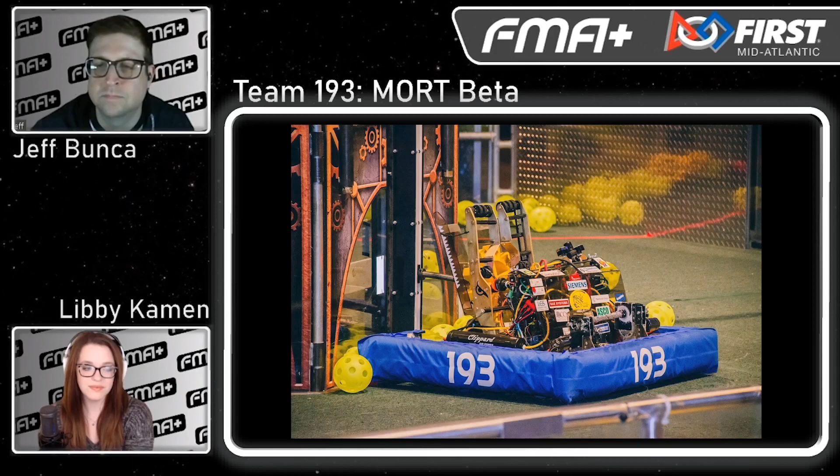MORT Beta was created in 2013 to give a more hands-on opportunity to freshman FRC students, because in our school, with its size, there are a lot of people going out for the robotics team. So underclassmen don't really get as much of an opportunity to work on the robot that upperclassmen really do.

That's really cool. So MORT Beta, obviously being the sister team, the JV team to MORT, Mount Olive Robotics Team 11, who I'm sure we'll hear from later in the FMA Plus season. But you guys applied first. Props to Beta. I'd love to hear a little bit about that relationship with MORT.

So we share a school with MORT 11, and we share our resources, our experience, and memories throughout the season. We definitely lack a lot of experience compared to them, but we make it up in our drive and our creativity, and we definitely have a sibling rivalry. It's a lot like gracious professionalism within First. We really want them to succeed, and we want to help them, and they want to help us, but we definitely compete as hard as possible, and we definitely want to beat them just like any other team, but I think it's a little bit more competitive between us.

Yeah, that's awesome. That was definitely one of the questions that I had on my list, whether you guys kind of kowtow to the upperclassmen, or are you the scrappy underclassmen getting in there to show them that maybe experience isn't everything. I like that attitude and approach. Yeah, our enthusiasm is definitely really high, so we want to try as hard as we can to do as well as them, if not better.

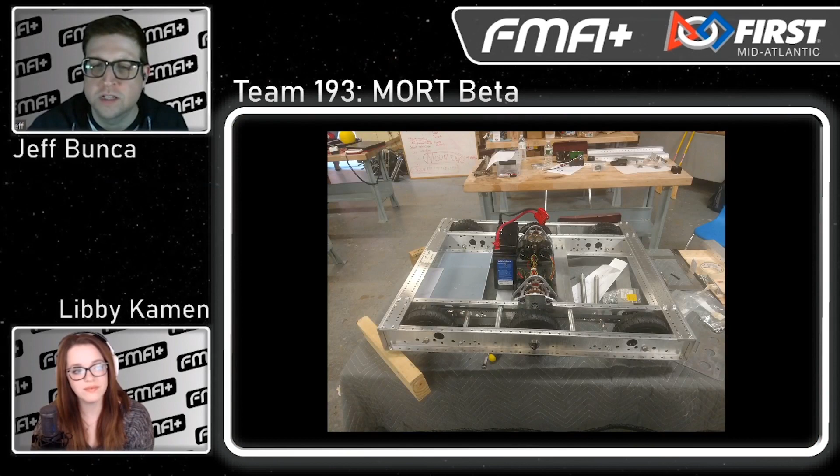Cool. So Rohan, it looks like you're the guy to talk to about the drivetrain and the drive base specifically. Maybe you'd like to talk a little bit about that now. Yep, for the drivetrain, it's the good old reliable AndyMark 14U4 chassis, and that's because we do not have to redesign a drivetrain, and this was the best option for us to choose. It has 6-inch pneumatic wheels for getting over the rendezvous point in this year's game. It was slightly modified to hold our gearboxes, and is powered by 4 Falcons, 2 on each side. It is a single-speed gearbox with a gear ratio of 75-13. And a planned change for this was to go from a double thickness pulley to a single pulley because they were shattering.

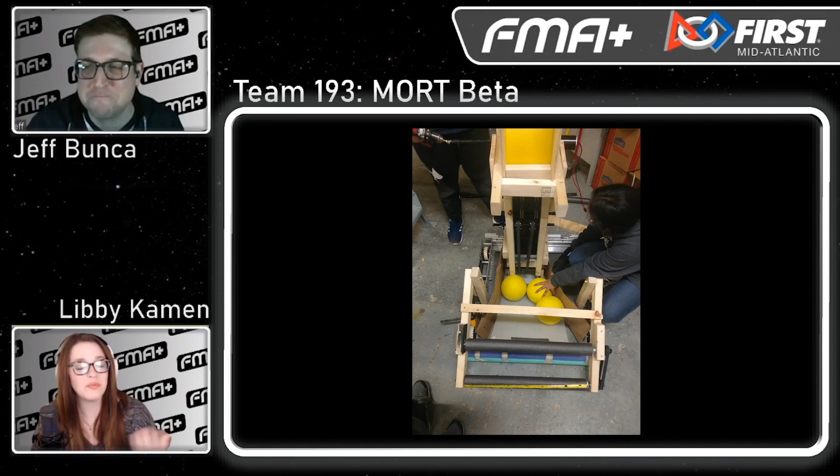So moving on through the robot subsystems, let's talk a little bit about your power cell pickup, that intake. So our intake was the first design that we ever made, and it worked well, so we just had to improve on it. It's an over-the-bumper design with a foam roller, and we have a PVC pipe and pipe insulation, which is covered in gaff tape, which prevents the foam from ripping. And it's powered by a Neo 550 motor, which is attached to a versaplanetary gearbox.

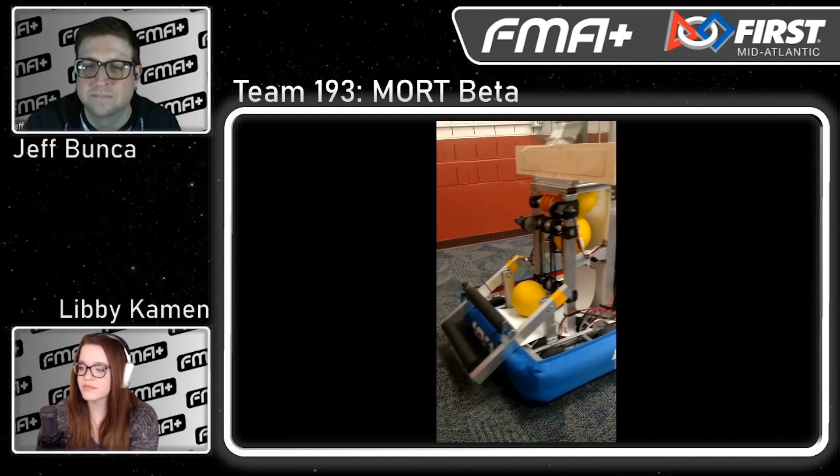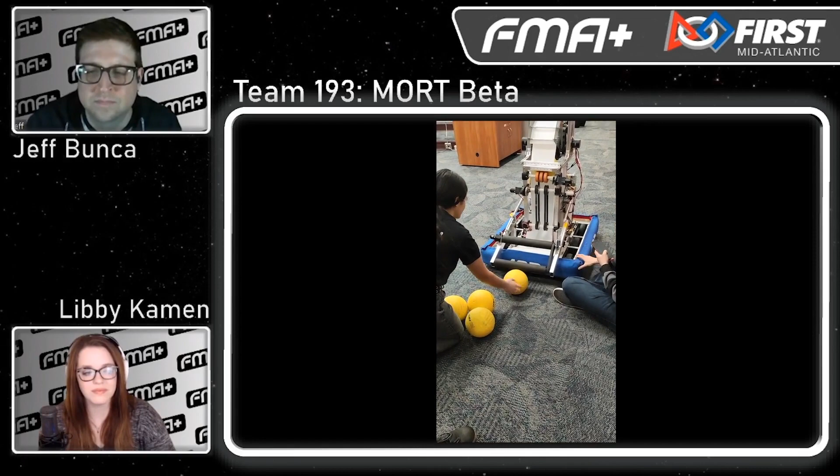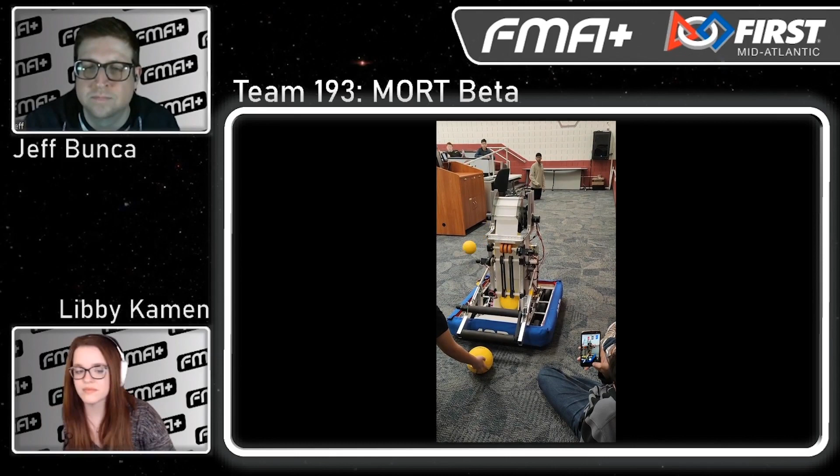It uses pneumatic cylinders to pull the intake within the frame perimeter. A tricky part of this was figuring out the best location for all our rigid pneumatics. We also had to make sure the intake had enough slack to move around, but not too much slack because it may become caught on other robots in a match. Another problem we had was jamming and ejection of power cells, so our intake ramp and compression were changed many times. After that, when power cells were brought in, they would also get caught on the sides of our ramp. To avoid this, we added some surgical tubing, tied to the tower and intake bars to bounce any ejected power cells inward.

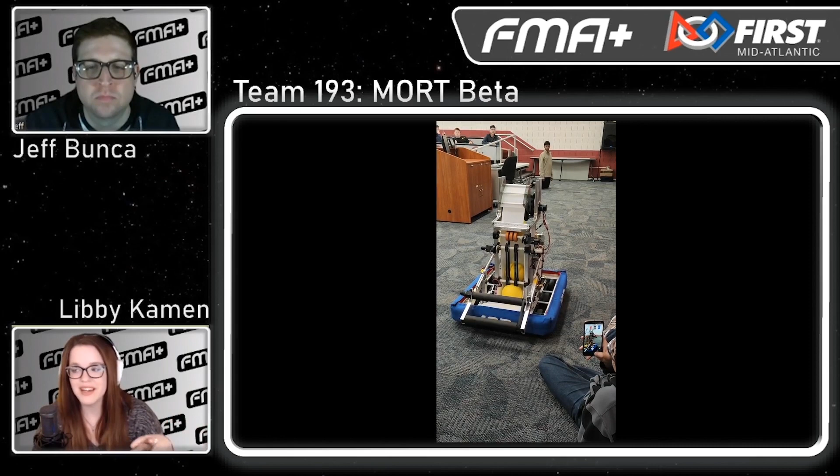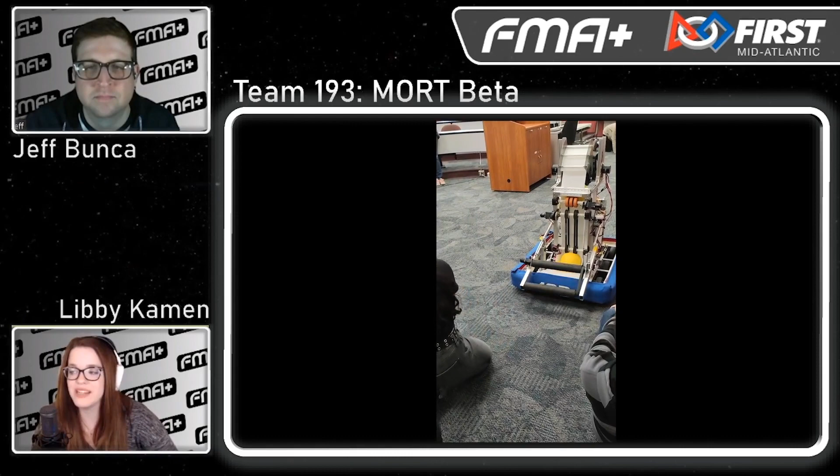That's actually something we're looking at on your video here. We can actually see in MORT Beta's prototype videos, their intake power cell goes up, looks great, and then it's a little squishy. I know this was one of the biggest problems with the power cells this year, was just how easily they like to jam in traditional FRC mechanisms. So it's good to hear you guys were iterating on making sure they got unstuck. Yeah, I think what really surprised me this year was just how small of a gap a power cell could work its way into - like 1 inch, 3/4 of an inch. It's crushing down into a little yellow pancake of disappointment.

Rohan, let's talk now about your tower and your feeder system.

The tower is the main structure of the robot, made out of VersaFrame. It brings power cells to the shooter and holds 3 of them. It has 2 belts on pulleys on one side, along with compliance wheels to push the power cells into our shooter. This system is powered by 2 Neo 550 motors connected to VersaPlanetary gearboxes.

If there were any areas we could have paid more attention to, it would have been the tower, because it had frequent power cell jams, which impacted how the power cells fed into the shooter. A planned improvement was to attach a second system of belts so the power cells would not jam as often.

That's great. I love that you guys are thinking ahead to when we eventually get back to our robots, and what iterations you would implement. That is a sign of a really good engineering process, so I think you have a lot to be proud of.

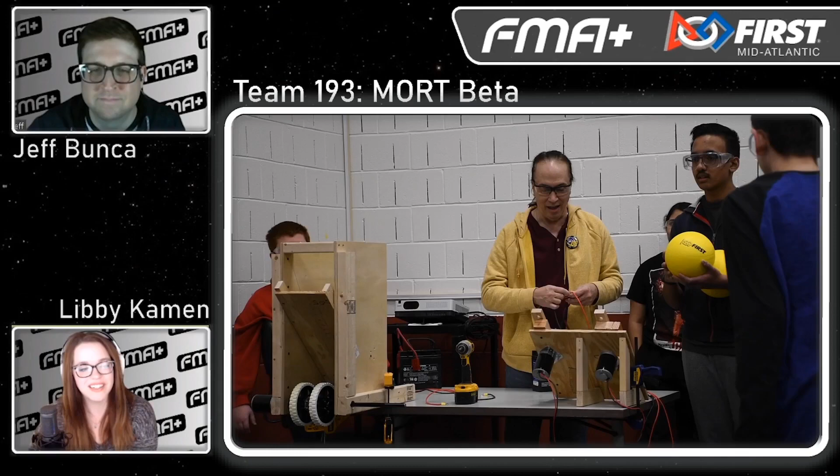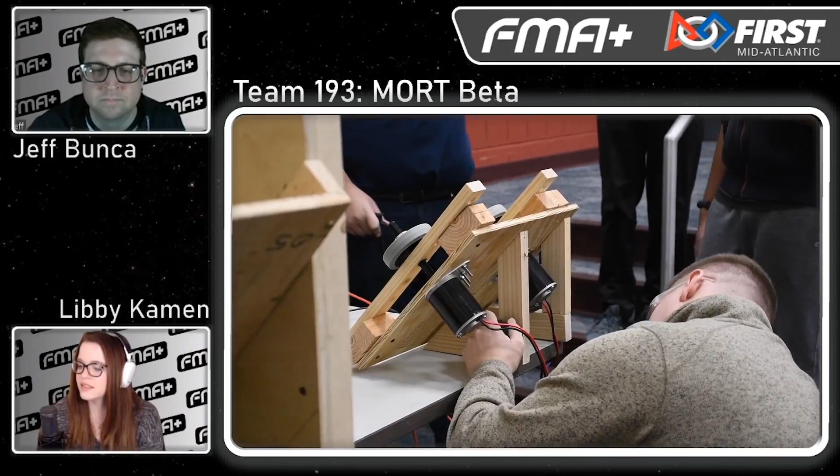For a shooter, we put a large focus on consistency and accuracy. We began by making different prototypes out of wood, a double flywheel and a single flywheel. We also accounted for human error while testing these two prototypes, such as the placement of the power cell into the shooter and the velocity of the power cell while entering.

In our wooden prototypes, we really looked at the angles, compression, wheel tread, the number of wheels, and the wheel mass and size. For the single flywheel, we experimented with a curved versus a straight hood, and settled on a curved hood for consistent compression.

The wheels are a really important part of our shooter because heavier wheels mean more stored energy, giving us good consistency and shot, but a long time to reach full speed since they're heavy. Both prototypes had their advantages and disadvantages, and were fairly even on performance scale.

I can see in your video here you've got the two sort of shooter types going head to head in your testing. That's a really nice way of quite literally comparing one to one what you're going to be doing. Nice work. What was next for that shooter?

Our final metalwork decision was a single flywheel as opposed to the dual flywheel. Some flaws of the double flywheel were that it added a lot of complexity to our robot, and it also gave significantly more power to the power cell, which was unnecessary because it would bounce out of the power port instead of going inside.

In our final design, we had a single flywheel with 4 high grip wheels, mounted to the tower on top of an Armorbot turret. We had 2 Neo motors at velocity control, geared to reach higher speeds. We also had an adjustable curved hood made of corrugated plastic, powered by a 25 kg servo and an overdrive ratio with a belt and pulleys.

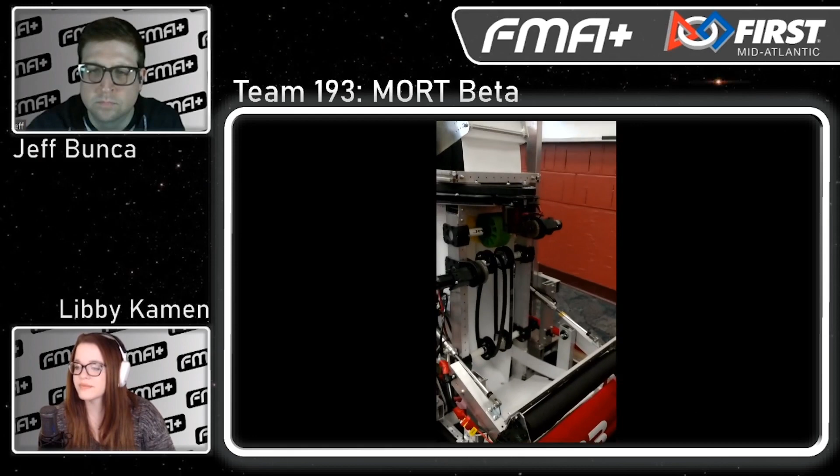But it was definitely worth it because it added much more versatility to the shooter. It was best seen at the practice field, and it was really amusing to see our robot shoot from various areas across the field.

Programming was able to bring their skills to improve our shooter with the limelight that outputs an X and Y coordinate of the target position. Programming also made mathematical relationships to automatically adjust the hood and turret positions.

Awesome, so it sounds like you guys are super prepared to score power cells into the power port. And obviously you know how you're getting them off the floor, or I guess acquiring the power cells.

But now let's talk endgame. Sophia, what kind of climber situation does MORT Beta have planned for the endgame this year?

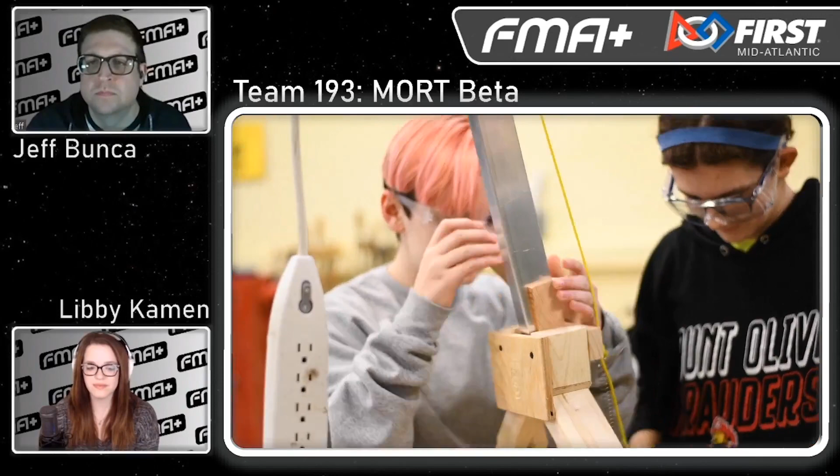We knew climber was really important to us, but it ended up starting later in the build season compared to the shooter, which took a lot of prototyping early on. We initially made a metal prototype using a big piston and a pneumatic system, but testing showed the pneumatics required to carry the entire weight of the robot would need 6 tanks, so it'd be too big and we didn't want to spend that much room on our robot for the pneumatic tank.

We had little room for error and would only really have one chance to climb with that system. Since we have an all-freshman team without the experience of a drive team, we didn't want to take that chance. So we decided to draw up a new idea using a spring, PVC, cord, strap, and motor system, all within a 2x1 channel.

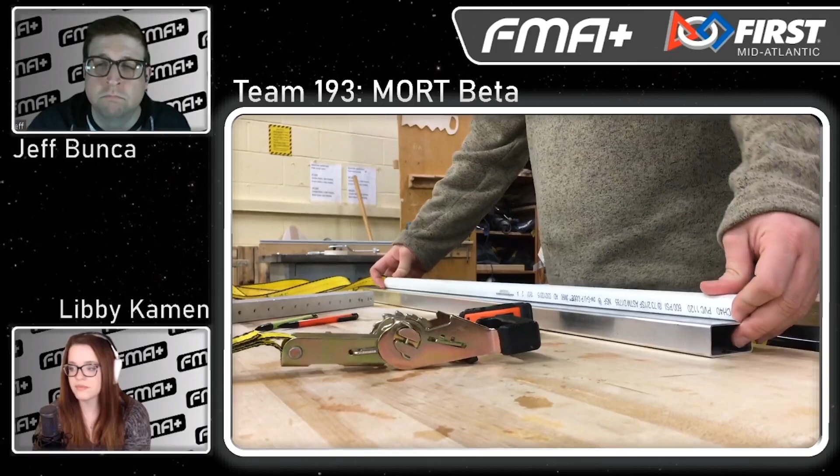Even that prototype changed a lot, and we used a lot of trial and error to find ways to prevent jams and maximize the climber's reach. We eventually settled on a design with a PVC running through a fabric sleeve attached to a 1x1, with a constant force spring running along the side inside the sleeve to propel the PVC upward toward the generator switch. This design really prevented jams and also stopped the climber from leaning while going upward, because we used a very sturdy fabric to hold it up.

We also added a ratcheting attachment to the gearbox so the robot would not fall when power was cut to it, and we planned to add limit switches at the bottom so we didn't damage the motor during the game. Since we didn't use a lot of CAD beforehand, most of it going to the shooter and tower placement, we had a lot of trouble finding where to mount the climber, especially since we wanted the robot stable and didn't want it to swing a lot, which would be dangerous for our robot and everyone else's.

So we mounted 2 climbers, one on each side, over the drivetrain wheels, so the weight was centrally balanced. There's not really a good way to plan for that in advance.

I think this is a really, really smart way of integrating a system that you didn't originally plan to have in a certain spot. That's really cool, guys.

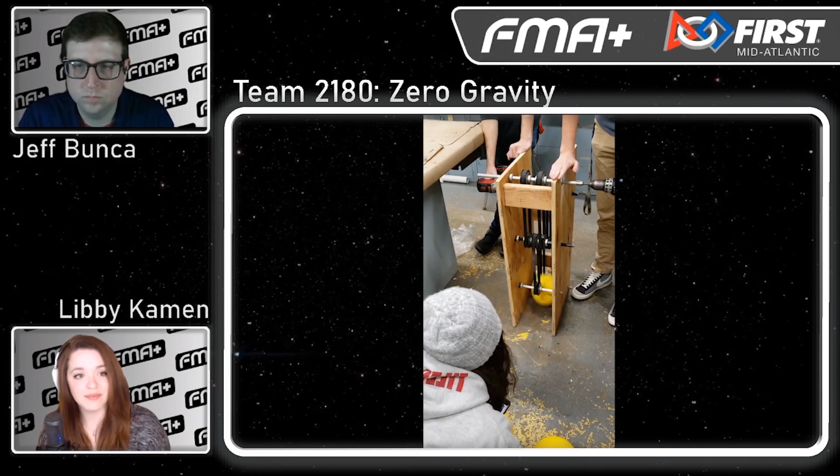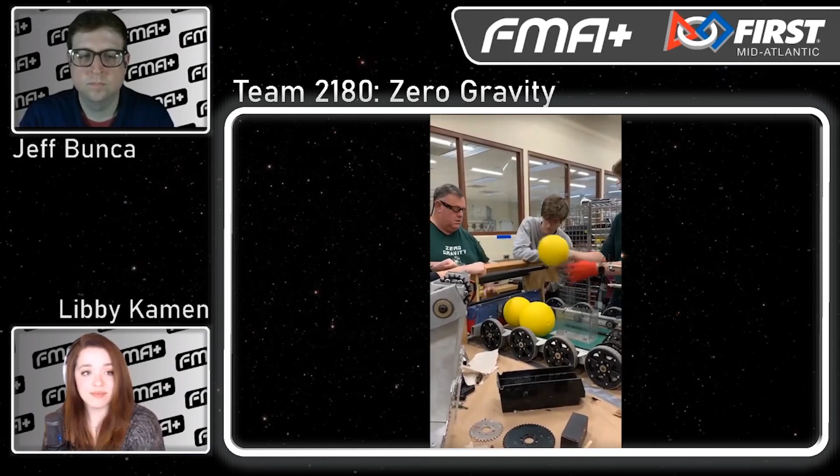You said you're going to overhaul your process, make sure your designs are effective. How'd you do that? In previous years, we really had one or two kids design most of our robot in our CAD and SolidWorks. This year we got a bunch of new freshmen, and I think 3 or 4 freshmen pretty much designed our whole robot, which was really impressive. They had great help from all of our mentors, but that was something that really helped us this year, because they came in with an untainted eye of stuff that our team personally didn't like, but they had never seen it before, so they didn't know what to think about it.

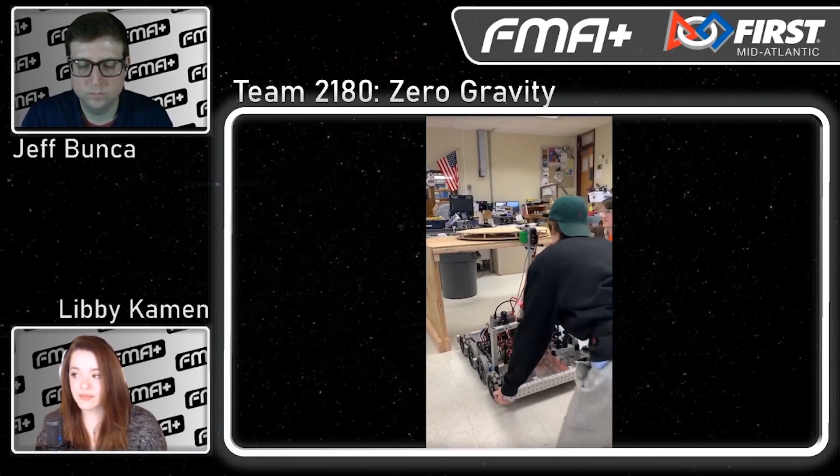We also put a lot of effort into really getting it right, through testing, through prototyping, and then fixing as many little issues as we could find before getting to final production, before hitting the final robot, which is really something that, at least from my distant perspective as a programming captain, we haven't really done in previous years.

Cool. So let me ask you guys this, I see a little note here, this might be a silly question, but it says here you started with a black box. What does that mean? So every year, as soon as we get home from kickoff, we all pile into our room, and we go over the entire game, what everything's worth, all the point values.

We read through the manual, and then we all sit together as a team and think about what we want the robot to do, but we don't imagine what it's going to actually look like. We just envision a floating black box, moving in some unknown way and accomplishing all of these game tasks.

So you guys talk about a priority list in terms of how you decide what the robot's going to do. What did your priority list look like this year? How'd that process go for you?

So once we finished our black box meeting, we had this huge priority list of things we wanted to accomplish, and it involved everything on the field. We knew that if we wanted to accomplish all of our very high aspirations, we needed to focus on designing subsystems and parts that would fit together, but that could be maintained, programmed, designed, and constructed separately.

It's always really important to look at things you can iterate forward on, especially as you're cleaning up your build season and trying to make it a really documented, robust engineering process. There's a lot that goes into that.

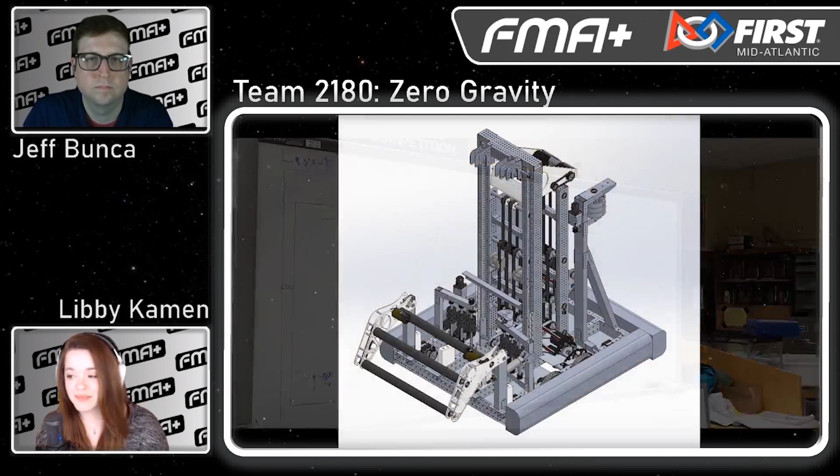So what was your next step? Where did your robot end up? I think our subsystem that probably went through the most iteration would have to be our intake and our funnel, as we called it. As you can see, it's made out of Lexan and some PVC wrapped in rubber on the final robot.

Our first prototype was wood with a couple of bearings punched into it. I think it's really interesting to see how far it came to find its final form. It was something we especially struggled with at our competition - we had a lot of trouble with that particular subsystem getting jammed, or it would just not fire in specific matches.

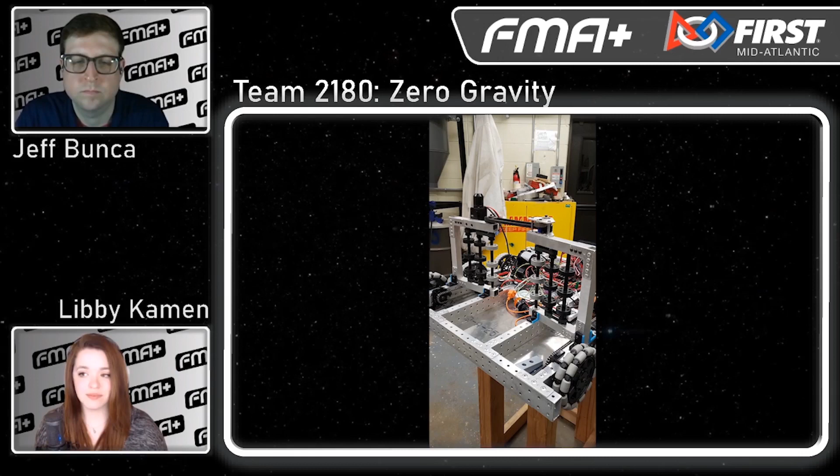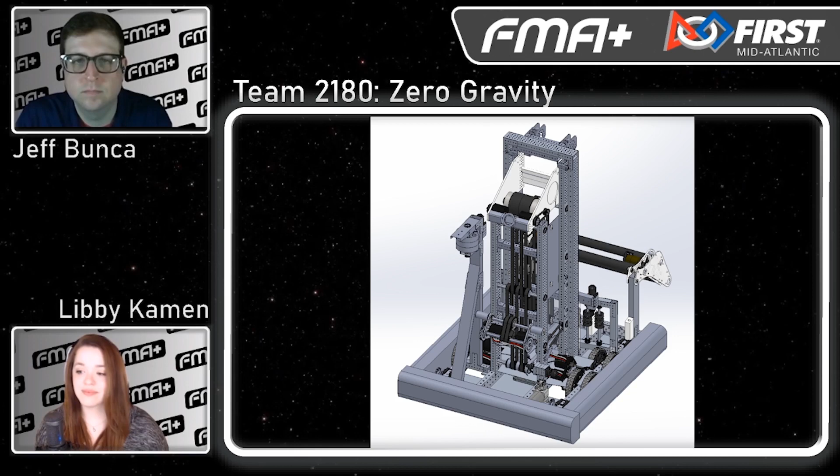That was something our pit team and Ravi worked really hard on to get going while we were at the competition. We later actually improved it, although with how things turned out, that improvement isn't going to see competition. But the newest version actually fixed a lot of the issues we were having, so we kept iterating through that.

Cool. Yeah, looking through the pictures of your iterations of the intake, everything looks really clean and well put together. So as you guys got ready for competition, you said you wanted to prioritize doing a little bit of everything in the game. I know, Robbie, you talked about being pretty proud of the robot's power cell shooter - why don't you tell me a little bit about that?

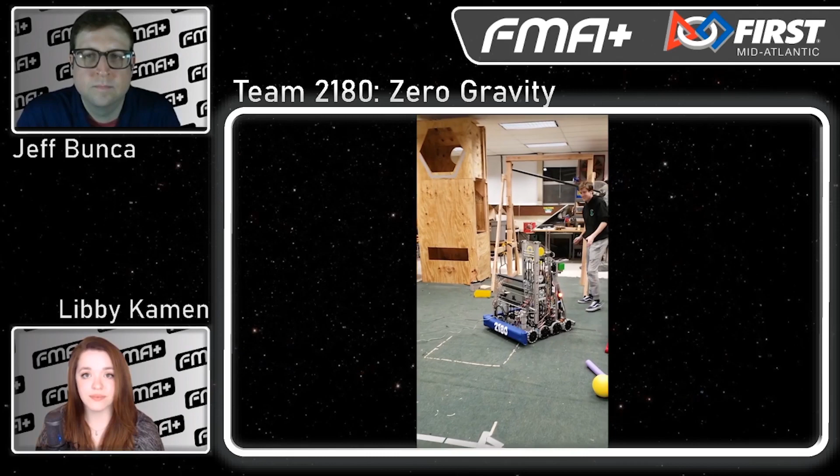I'm partial to it just because I spent most of the build season working on the code that would keep it consistent and accurate, and it actually wound up working pretty well once we got to competition code-wise. But mechanically it was beautiful - even the first prototype shot pretty well, and the actual final product was really incredible to work with.

Cool, alright, Ravi and Billy from 2180. Let me ask you guys - one thing that 2180 has right now is the fact that they got the opportunity to compete this year, which a lot of us have not yet been able to do. So what can you tell us about competing in Infinite Recharge in 2020 so far this year?

So for me, this year was a lot different because the last two years I was our operator, but our main driver graduated last year, so I was bumped up and promoted. That had a very different feel for me - that was a lot of fun.

But I feel like the entire attitude around the game this year is a lot different. Teams really have to work together in order to score the most points. It's something you kind of saw last year with assembling the rocket - you had to put on those hatch panels before you could put the cargo in.

It was something I thought was really interesting this year, the different team strategies of where they like to collect cargo, and how a lot of teams were just like, oh, you like to go there? We'll go across the field, it's fine, you can do that, we're good, we're flexible. That was really interesting for me to see, kind of the evolution of the game this year.

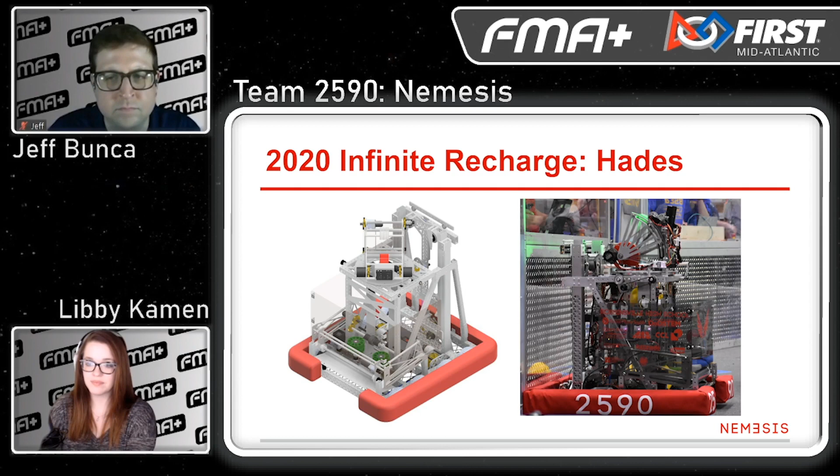Named Hades. This is a CAD rendering that we made in Autodesk Inventor, and on the right is a picture of us on the field at the Northern Connecticut district event that we were fortunate enough to attend. At the beginning of the season, we made a priority list of things we wanted our robot to do. First, we wanted to shoot from anywhere, even while under defense. Second, we wanted to achieve the trench shot, which is the shot from the far side of the control panel. Third, we wanted to have post-climb leveling to enable a third robot to climb. Fourth, we possibly wanted to make a buddy climb so that when we climb, we lift another robot with us.

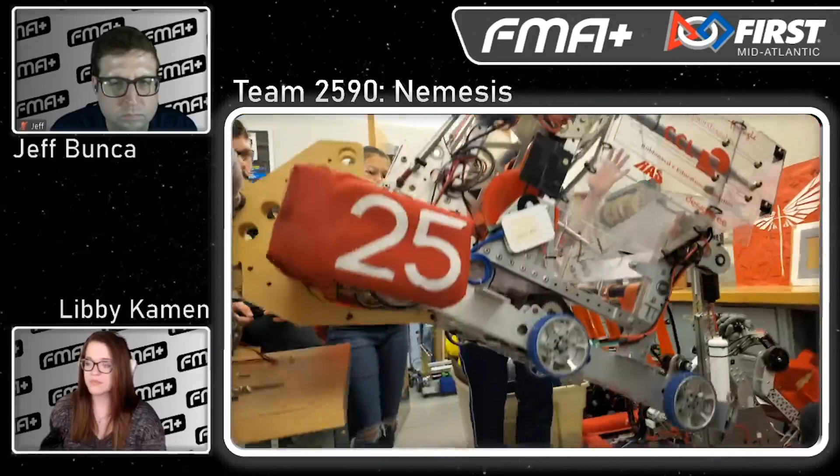For the drivetrain, we went with a West Coast Drive 27.5 by 32 inches squared with a speed of 8 feet per second, driven by 4 Falcons. We used 8 6-inch pneumatic wheels with an 1/8-inch drop center. The benefit of the pneumatic wheels is that it allows our tall robot to get through the rendezvous point quickly. The purpose of the 8 wheels is that it keeps our robot steady so that while we're shooting, it keeps a constant shooting angle, and for the trench shot that makes a big difference on whether we score or not.

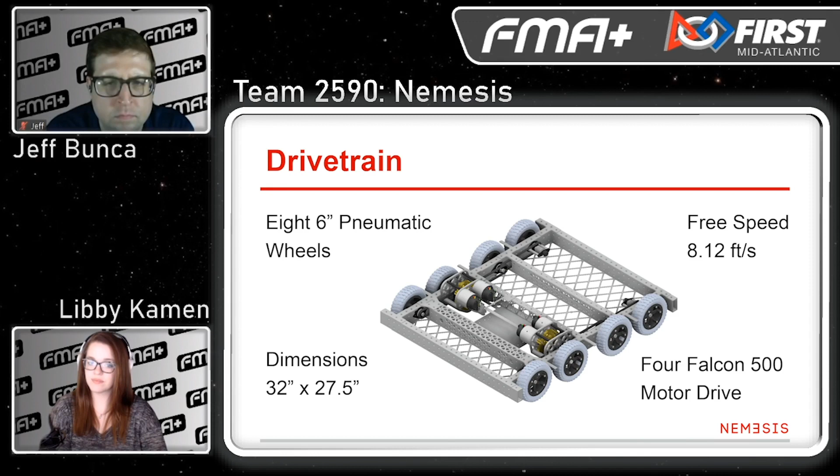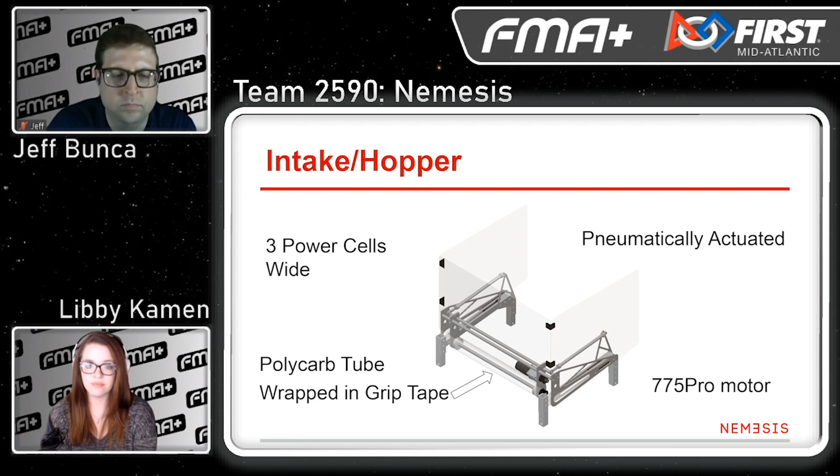So on the next slide is our intake and hopper mechanism, which we actually combined because they both needed to extend outside of the robot. We use a pneumatically actuated linear slide system to slide both out around 8 inches so that we can hold the maximum amount of 5 balls. Our intake itself is comprised of a polycarb tube that we wrapped in grip tape that is just as grippy as compliant wheels, but weighs a little bit less.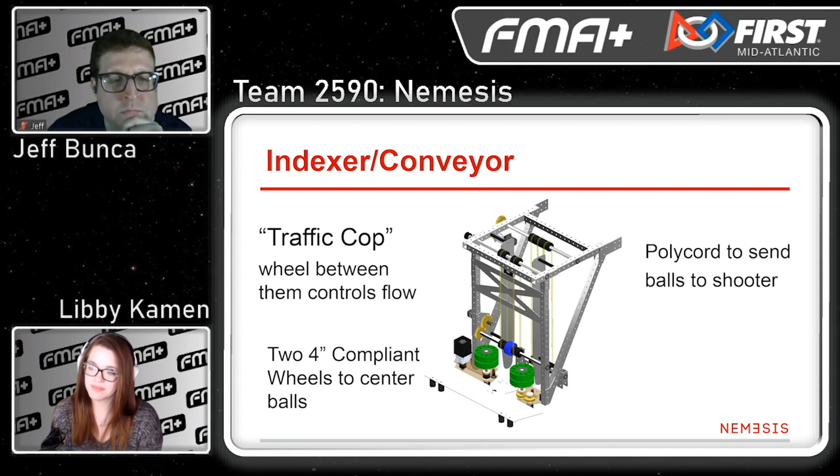For our final indexer, we went with 2 4-inch compliant wheels on either side of our hopper. Our conveyor is polycord bands on the front and back, and it's powered by a Neo 550 in the back. The blue wheel that you see is what we call our traffic cop. It's powered separately from our conveyor, so the bands on that shaft spin freely. This just allows us to control the flow of balls better and prevent further jamming.

So here we have our single flywheel shooter. We used a 6-inch Fairlane wheel. It has a variable position hood. This allows us to shoot from the initiation line all the way back to the far trench. And with constant limelight tracking, we were able to lock onto the power port using our turret to avoid defense.

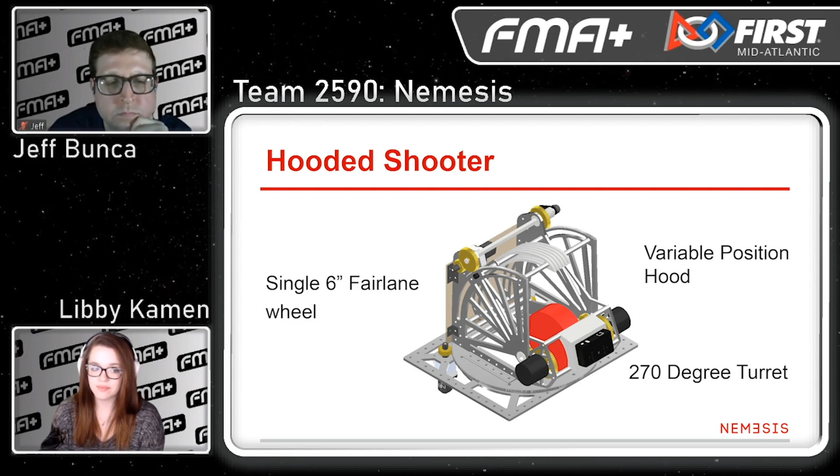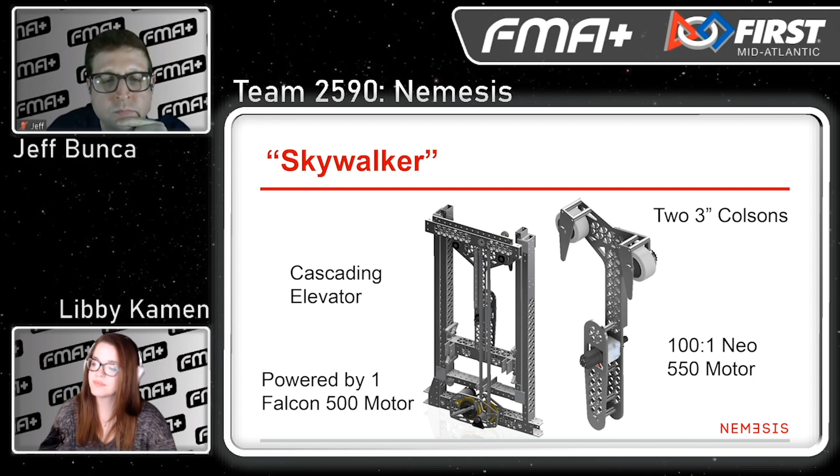So our Skywalker is the name of our climber leveler system. This mechanism uses 2 3-inch Colsons powered by a 100-to-1 Neo 550 to allow us to roll over the bar to get the extra 15 points. That mechanism is on a cascading elevator that's powered by 1 Falcon 500 motor that, because of a custom gearbox, can lift the entire weight of our robot.

Just to talk about software for a minute, we use a limelight to auto-align our turret, so wherever we are, our turret is facing the power port. That limelight also has distance sensing so that our shooter hood can adjust so that no matter what distance we are away, we can still make the shots in. We use proximity sensors in our conveyor so that we feed a ball every 7 inches, so that once we go to shoot, all 5 balls are right next to each other and we can shoot faster.

In Auton, we use path following software so we can have paths such as one where we shoot 3 balls from the initiation line, go into the trench, pick up 3 more, and then shoot those also.

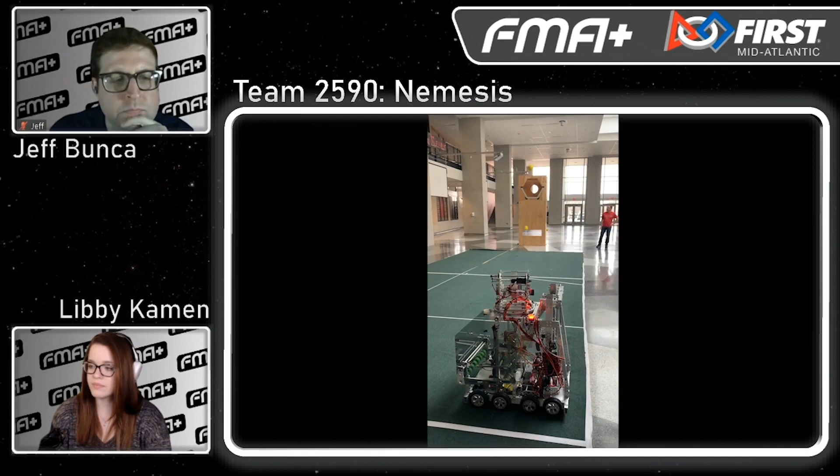This is a demonstration of our robot. We were just testing our intake to shoot our subsystems on the left. We were able to make multiple outer and inner port shots from the far trench. However, we noticed that when the balls were worn out or torn apart, they didn't shoot as far as we wanted them to. On the right, we have our turret.

This is the first time that we got a gear machined. We sent it out to one of our sponsors who laser cut it out, and it's powered by a Neo 550 on a Versa with a pinion gear.

Next we have our robot performing at our competition. It's hard to see, but we're in the left back by the Red Alliance trench, shooting a couple shots in teleop. On the right side, we were able to get a level triple climb with our partners in qualifications. We're climbing on the right.

During this competition, we ended as the 8th Alliance captain and we're semifinalists. To top it all off, we also won the Entrepreneurship Award.

After Connecticut, we saw a few things that we could change or redesign in our robot, most notably our indexer, because it was very prone to jamming since it overcompressed the balls. So our new design uses a turntable on the bottom to spin the balls in and a ramp that also removes all the dead zones. It still feeds our conveyor, just like the old one.

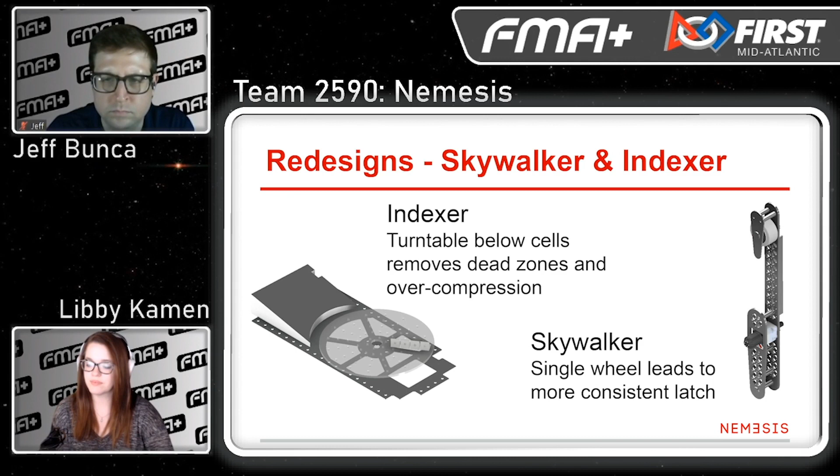Our Skywalker, during the competition, had a few problems because it was hard to line up both of the hooks and wheels on the bar. Sometimes when we would climb, only one wheel would get on, and we wouldn't be able to level. We realized that we didn't need both wheels, so we removed one. Now we can climb every single time and level once we're up there.

There were 2 main issues with our drivetrain. First, our turning radius was not as good as we planned because of how the pneumatic wheels squish, leading to scrub since the drop center was apparently not enough. The other issue is our high center of gravity, which caused us to be extremely tippy, making it harder to maneuver and intake power cells.

So in order to solve both of these issues without having to remachine the entire drivetrain, we made a simpler fix by changing just the wheel setup to 2 Omnis in the front and 4 pneumatic wheels in the back. This way we maintained our stable, powerful pushing force while also decreasing the turning radius.

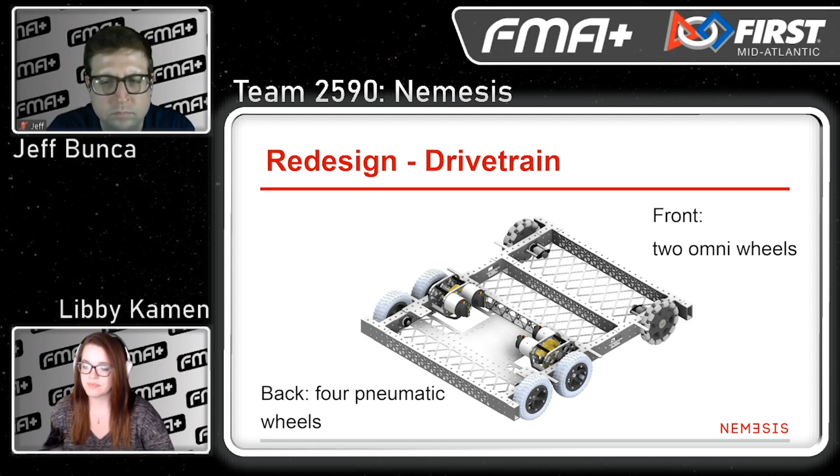So this concludes our technical overview of the robot. I want to thank you all for listening to us.

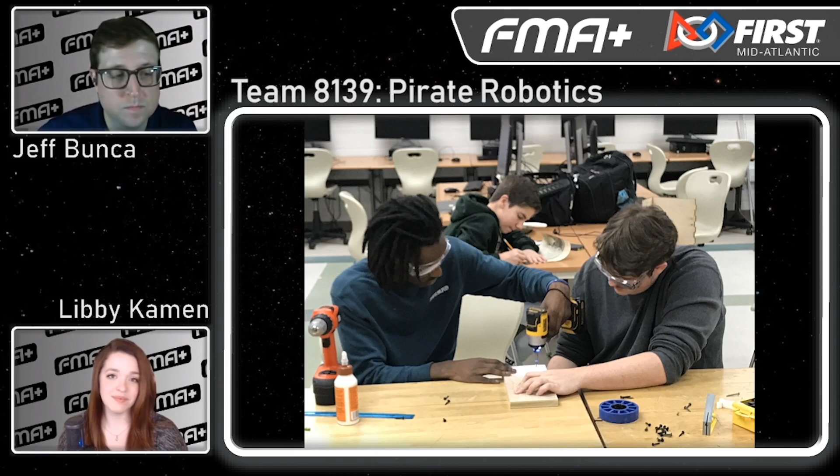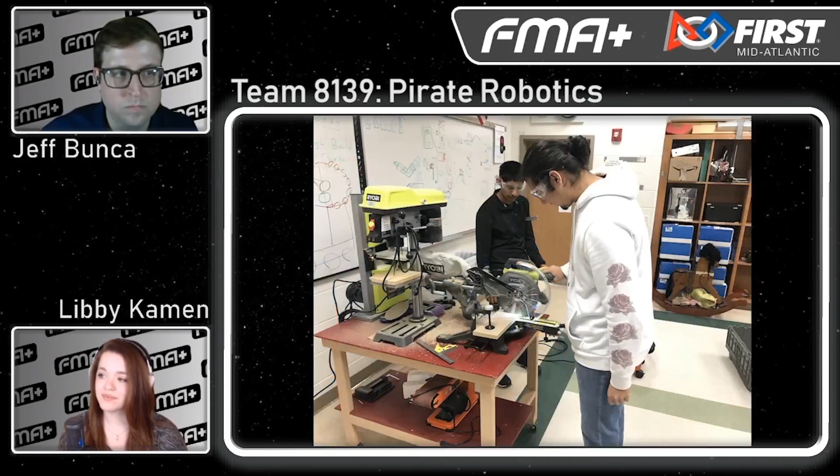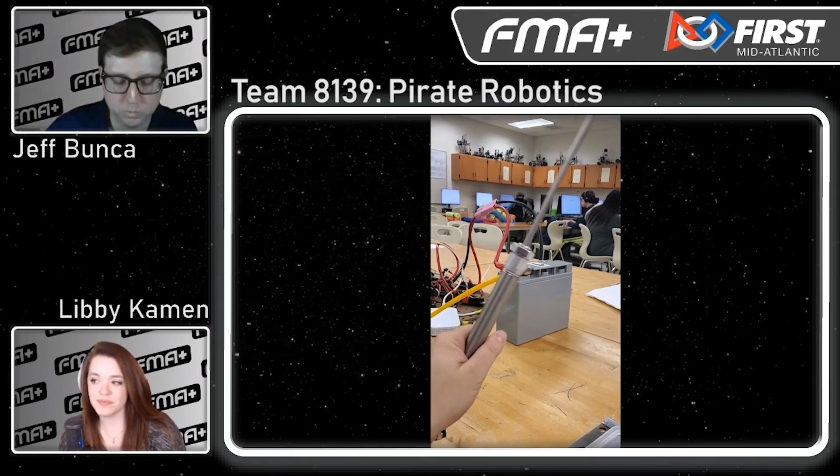Well, our team has competed for 3 years in the VEX Robotics competition. I personally, as a sophomore engineer, have only competed 1 year, and we did not compete this year. We've learned a lot of styles of the robotics challenges, and we know all the common concepts such as alliances and reveal videos, competitions, so that has really helped us in moving to FRC. Because we are familiar with running a robotics team and doing the basic tasks of designing and building a robot, it has really helped us, especially the way we've learned to work with each other, having groups of several engineers to help design and come up with ideas for the robot. It has been very good to help us in transitioning.

Cool, yeah, for sure. You guys are no stranger to robotics competitions in general. Adam, I know you've also done First Tech Challenge. You want to tell us a little bit about that experience as well?

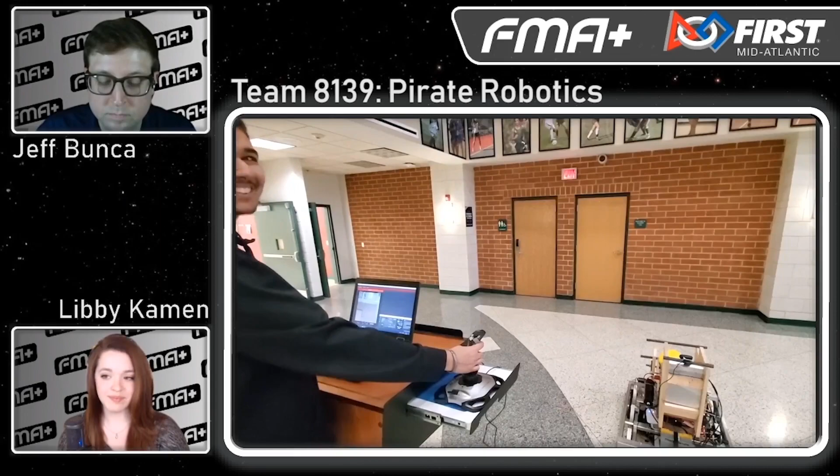Yeah, so I've been a part of an FTC team for the past 2 seasons with an outside Police Activities League organization. It's really helped me with this team going through the entire design process: breaking down the challenge, analyzing it, brainstorming what we think our robot can do, prototyping, coming up with different ideas and mechanisms before we actually start building, and then designing throughout the whole season, analyzing the different parts we need to buy and how that's going to fit into our robot. Specifically, I've learned a lot about CAD and how to use that to design parts, incorporate that with mechanisms, and really help with the overall design. But the most important thing is working together as a team to put all our ideas together to create one finished product. One of the things in the transition from FTC to FRC is learning all the differences in the design challenge, dealing with more complicated, more powerful parts, and figuring out how to use that and change the design accordingly.

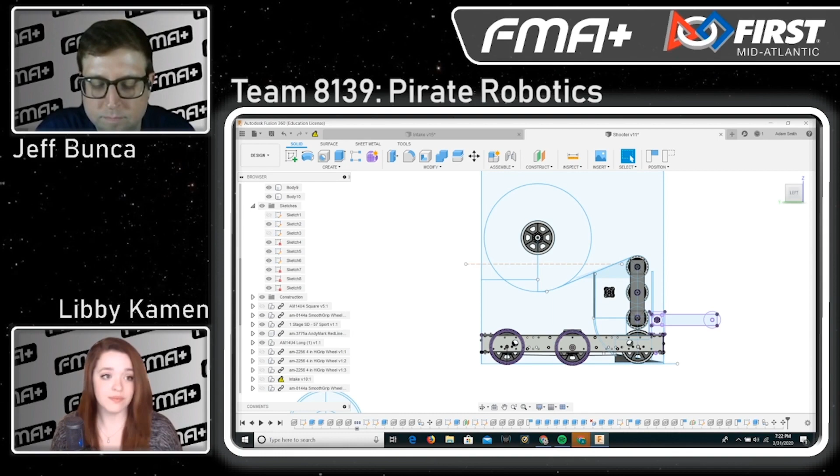It's awesome. It seems like you guys have a wealth of knowledge and experience for FRC rookies. That's really, really rare right now, I think.

Harmon, not to be outdone, it looks like you have a little bit to talk about here in regards to your experience with the engineering magnet program. Can you talk a little bit about that?

Yeah, so being a senior, I came into the school with the magnet program, which was the engineering part of it, and I was really passionate about engineering when I came into the school, so that's why I chose to go into that.

One of the things about going into the engineering magnet is I get to take a class. One of the classes was engineering design and development, in which I worked on a project for a year, and I have a good deal of experience working with real engineers and how to go about the design process, as we have to present our information to them in a specific order.

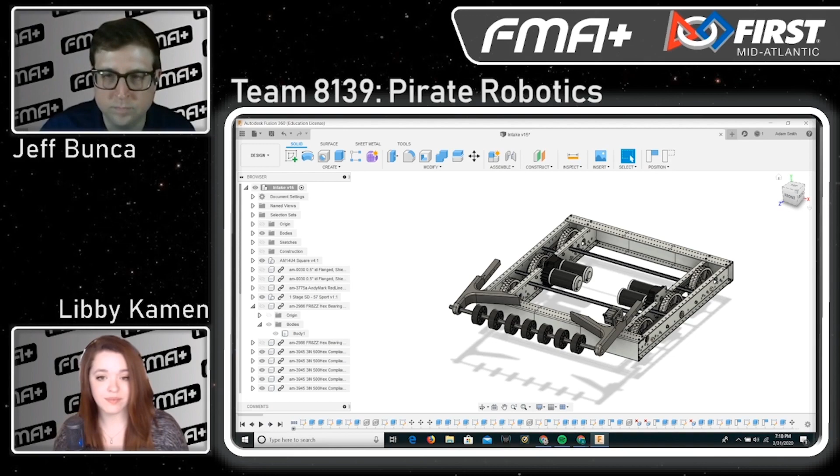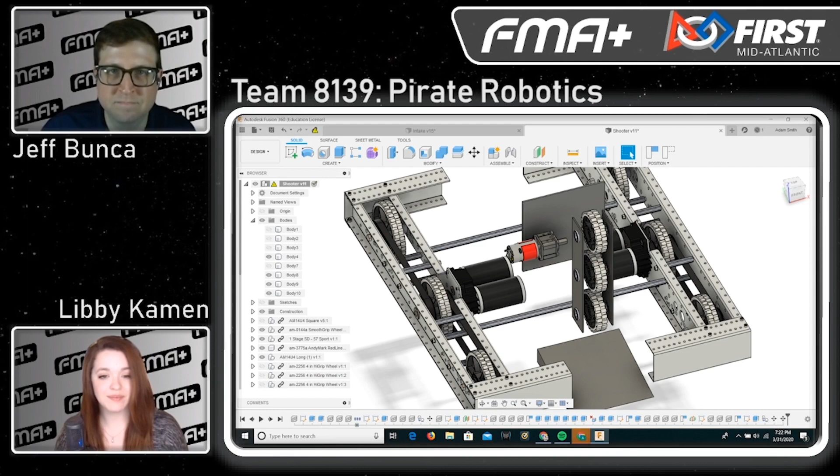Like we have to show our design process, our problem statement, and our purpose statement, and we have to model our time. So I have experience with modeling time and managing all the information given. And I did a good amount of coding during the magnet program as well, which gave me the experience I needed, and to back up all the extra coding I did, I had computer science, which really helped me understand what I was doing with my coding and how to go about it.

Very cool. That's awesome. Sounds like it definitely sounds, I gotta reiterate, Libby, it seems like they're so prepared for this. I'm really, really excited to see these guys compete for sure.

Absolutely. So Sam, like you've said, you've been with the robotics program for quite some time, and you've done VRC as well. So tell me a little bit about, from your perspective, the challenges of moving specifically to the FIRST Robotics Competition for your team.

Of course. So one of our main problems was we have such a young robotics program, and with that, we don't have a lot of money invested in us. So when we found out the prices of the parts and the entry fee into FRC alone, we were a little worried because we didn't have any money in our bank account.

But we were fortunate enough to search for grants, and our school was able to get a grant from NASA for us that was able to pay for some of those supplies and our entry fee into the competition. So that was really amazing.

We were fortunate enough at our school that most of us are involved in an engineering magnet program, or just all of us are very passionate about our robotics program. So we're there from 2:30 to 6 o'clock every day working on it. Working on the robot was great.

Our main challenge moving from VRC was that we now had the opportunity to work with any parts such as wood, metal, motors, that you had to put a motor controller box on, which a lot of us aren't used to, but it was amazing to really gain that real life experience outside of VRC.

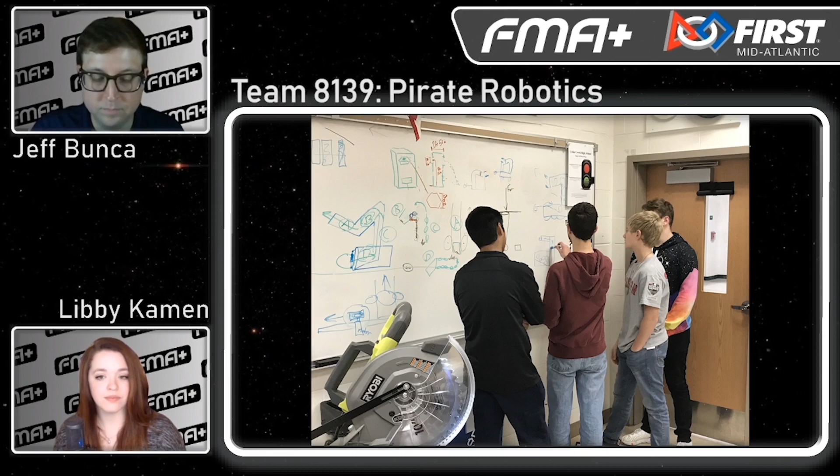We broke the robot down into parts, and we said, okay, well, out of the point system, what are the ways we can get the most points? And we came up with, we wanted a shooter robot.

So if we want a shooting robot, how do we want to do that? We would hash it out with almost a debate session in our group. Our engineering process of identifying the problem, coming up with designs, we had a lot of prototyping, a lot of testing to see, does this actually work? Is this our best option? Where should we go from here? And from there, test and retest is really our slogan. Try it again, does this work better? And just re-identifying the problem. So we were really working to make sure that no matter what, the engineering design process wasn't forgotten.

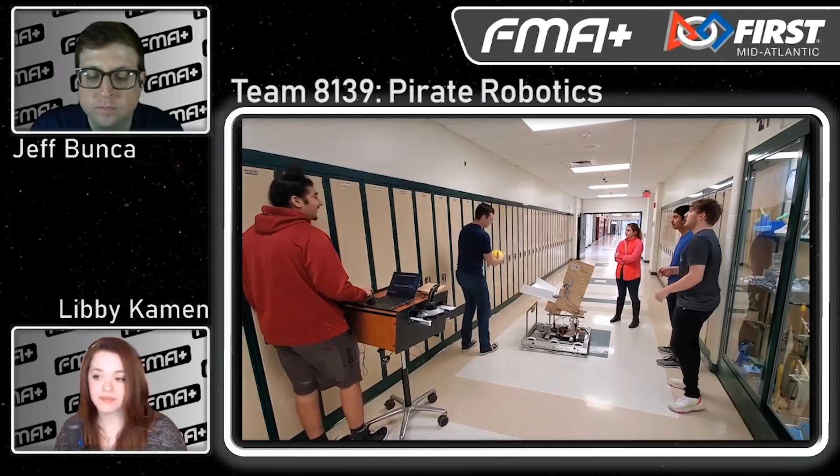That's fantastic, you guys come from an engineering background because you've got the process absolutely nailed. So Sam, and maybe Thomas and Adam, you guys can chime in here too. I want to back up a little bit. You guys talked about this debate decision-making process, and in previous conversations you've talked about how you try to apply a certain level of democracy to your design and decision-making process. Can you talk a little more in detail about that?

As a project manager on the team, it was really important to me that everyone had a say in the robot, that everyone felt our robot was going to be the best thing it could be. So I remember in one of our first meetings, I took a packet of Post-it notes and had everyone write their name and how they voted on how to decide for the robot. We drew columns on the board and everybody put their Post-it note in. When we ended up having ties, each time we'd choose one person from each side to debate out why we should go with the shooter over a hanging robot or a spinner robot.

So that was really important to us. Debating is one of the best ways to find flaws within the systems of the robot before you start designing, so we found that helped a lot. We learned how to compromise a lot within the design. Some team members hash it out a lot between designs, and they come together and figure it out from there.

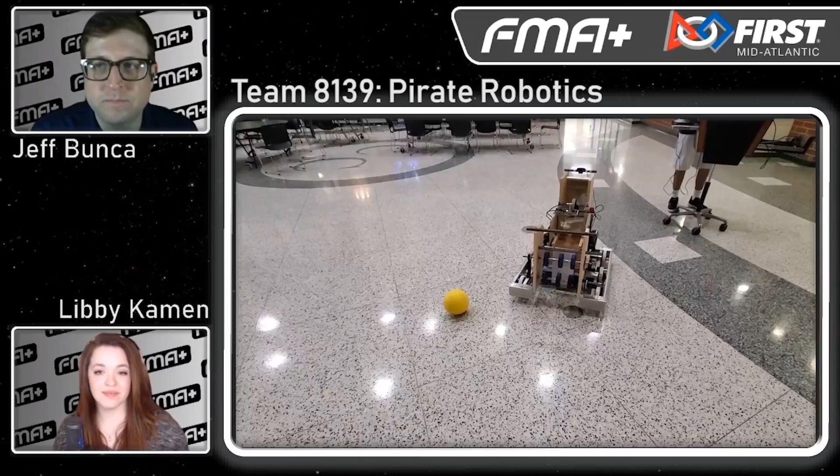So we had two main component sides of our robot. One was the shooter that Tom talked about, but the other was an elevator system that we made to intake the balls and feed them and elevate them to the shooter so they could be rapidly fed into the shooter.

So currently what we have with our robot is a kit, just a kitbot chassis that has the normal CIM motors. We have an intake which can intake and store 2 to 3 balls. We have a pneumatic piston that stops the balls from going into our flywheel shooter and lets us do one at a time so the flywheel can regenerate its speed and inertia after each shot. And then we have the flywheel which can shoot 10 to 15 feet accurately, and 20 feet if we just blast it.

That's awesome, it's a pretty good range right there. I like that you have that documented. It's like the options are aiming for goal or just send it. I love that, just blast it.

8139 Pirate Robotics, we've been so overjoyed to have you on our first episode of FMA Plus, one of our rookies here in FIRST Mid-Atlantic. Anything else you want to share with the robotics world before we say goodbye? Thank you so much for having us, we're really excited to be with you guys and talk about our team. We want to extend our thanks to Argosy for giving us a tool grant to help start our program, as well as NASA for giving us support to start up and enter FRC.

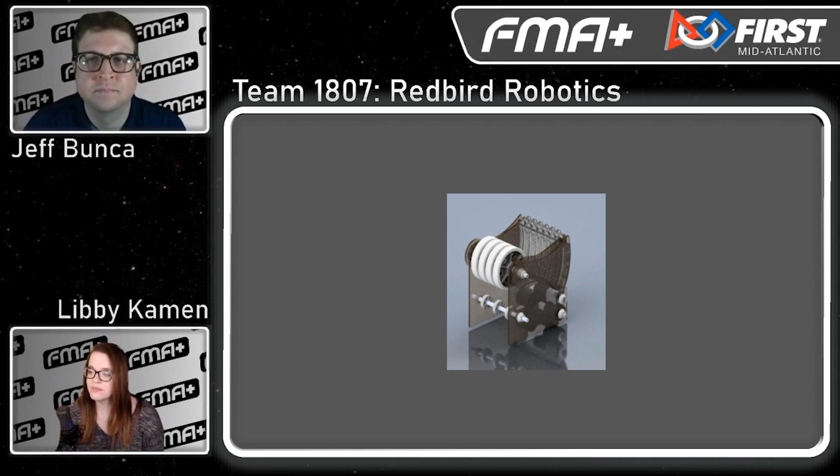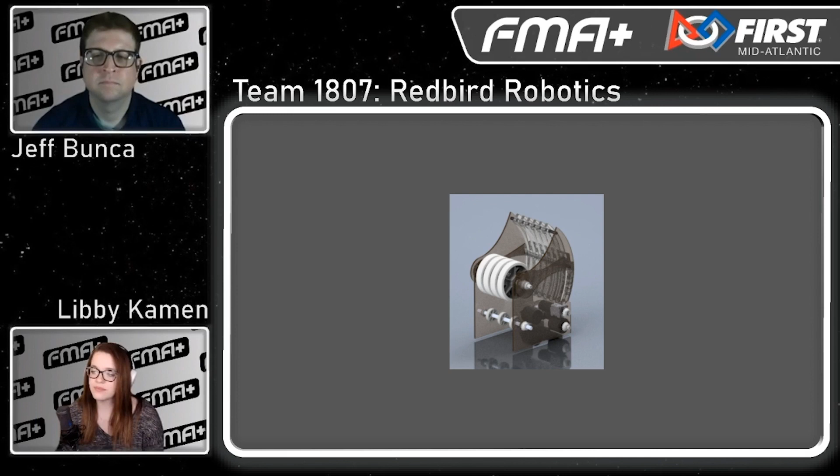Yeah, so the prototype process, I know Dan can talk more on this because he did the indexer, but for the shooter, we went through several rounds of development. Not only the one idea we were going on, we also had another shooter group. So we had my shooter group, and I was partners with Shane, another designer on the team. And then we had another shooter group, which was a 2 flywheel group. So we had 1 flywheel and they had 2. The idea was they just put the ball in between, and then we had ours that had fingers that changed the angle of the ball going up.

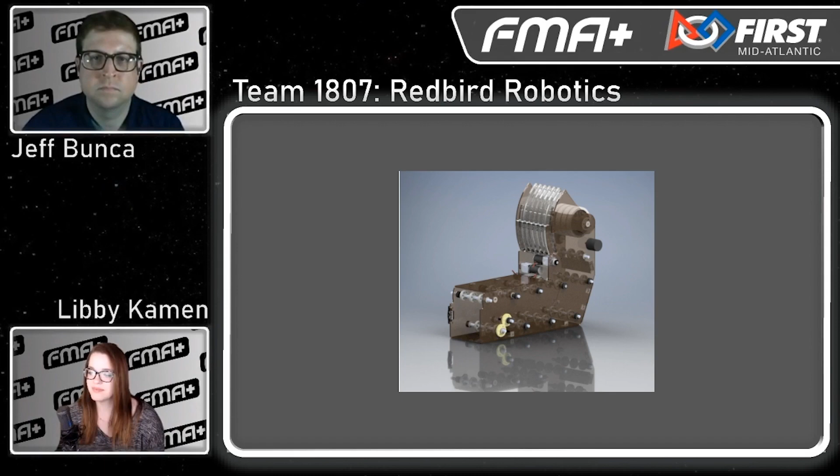But yeah, like you said, we also have a CNC router, but the CNC is great, while the laser cutter, that thing, when we had an idea, Shane CADed it up for me, boom, right on the laser cutter, 2 minutes later, pull it out, we're done, we're testing, on to the next one. I don't know about Dan, but I know the laser cutter is definitely instrumental in that, and going through all the processes without being held back, having the laser cutter allowed us to go that extra mile. Oh, that's awesome. Having that kind of rapid prototyping capability and being able to get to a final product that quickly is huge for sure.

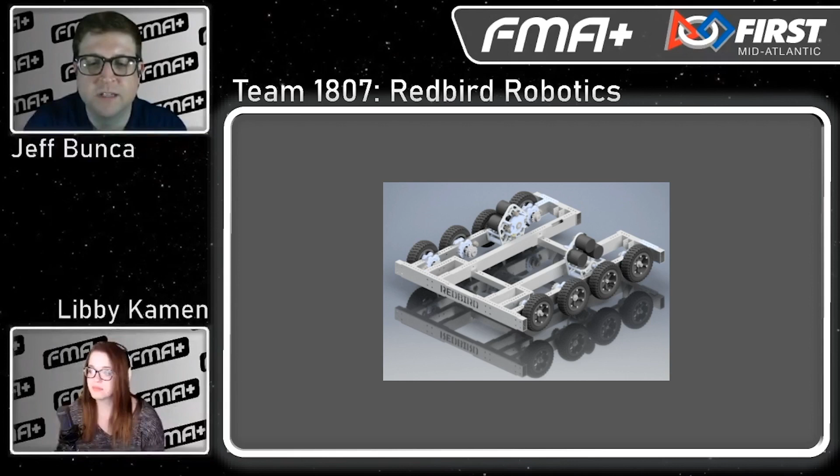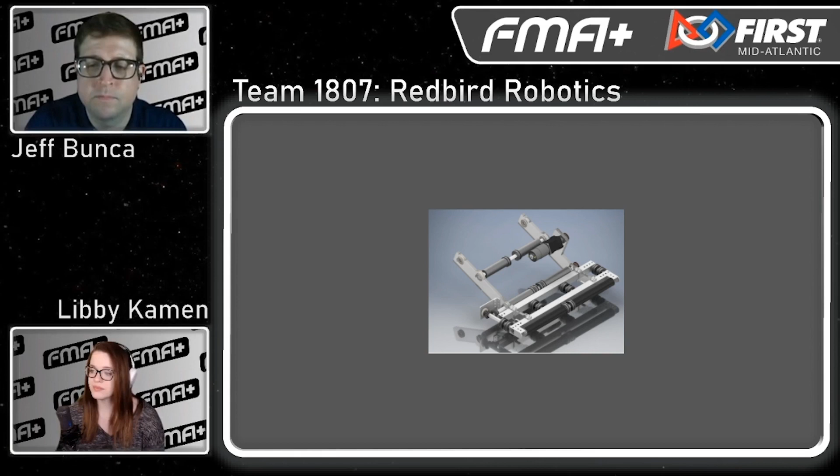Nice. So can you guys talk a little bit about the sensor usage and maybe some of the testing concepts and code testing you implemented this year as far as the programming approach? Yeah, so this year we had a lot of different little tricks that made our robot special. We originally were going to use time of flight sensors on our indexer to help with the balls going through.

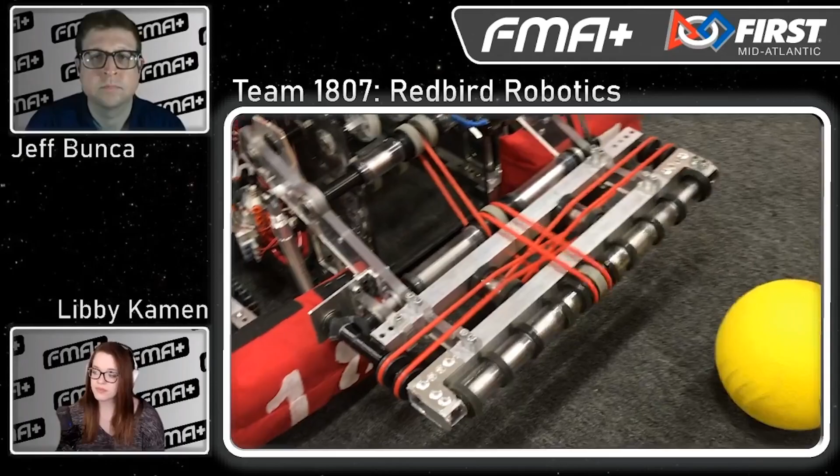We ended up using 2 ultrasonic sensors. We put one at the entrance of our indexer and one at the top. For the one at the bottom, when a ball was recognized and the distance was really small, it would move the ball out of its view until it's gone. Because we placed it in a certain spot, it would allow us to move the ball to its first slot to regulate that whole motion, making it real easy on the drivers to just move that ball without having to worry about doing it by hand.

The ultrasonic at the top, when that was covered, then we would know that it's full and ready to shoot.

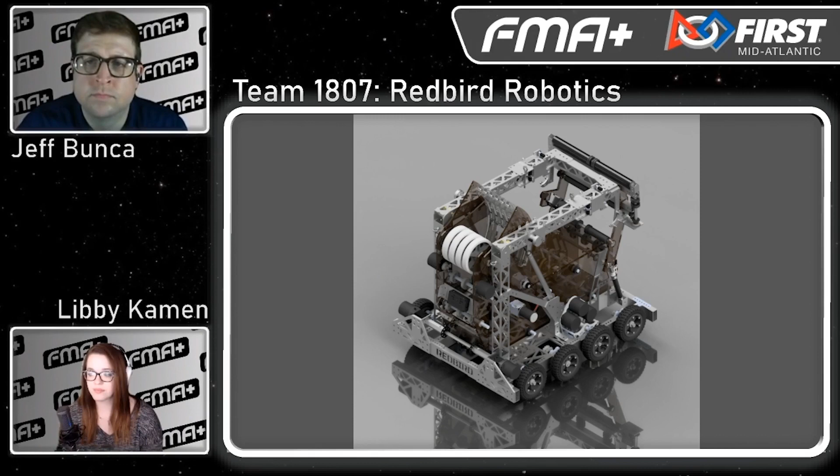Some big things we also used - this was the first time our current programming team worked on PID loops for our shooter. That was something we worked on for a while, narrowing down that shot, making sure we were very consistent. Also limelight concepts - over the beginning of the build season, we were working on calibrating our limelight to our practice target, getting it so we can be as accurate as possible and make driving as easy as possible.

Pneumatic wise, we had to code a couple pistons to pop up our climber and 2 pancakes to pop up the rest of our climber. And then our collection would be able to move up and down with some pistons too.

Our autonomous was something that we were working on and actually advanced over time.

All right, so let me ask you guys this. It says here that you guys had a big issue with the overall weight of the robot, which is something a lot of us are probably very familiar with. How did you guys overcome the weight challenges this year? Because it looks like your robot serves a lot of purposes, which means a lot of mechanisms and a lot of hardware. So what'd you guys do to come around that?

So I think throughout the build season, this kind of comes with our inexperience. We figured, we're a low bot, it's all right, we don't really have to worry about weight, we don't have that much space to work with anyway, I think we'll be fine. Then we had everything together and we realized we were like 133. So that was kind of a shock to us.

So pretty much we just went back. The climb was still being built, so we were like, all right, let's just pocket that. Pretty much the climb got pocketed a lot, and that cut down a couple pounds. And then we just went through the rest of the robot and changed any 1/4-inch plates - alright, going to 1/8. And that saved us a lot of weight.

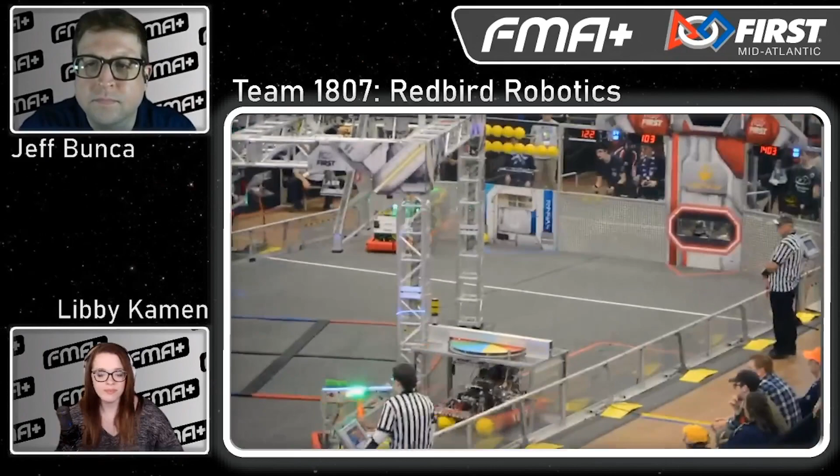And then RJ can go into the more build stuff from there. Yeah, so like Dan was saying, with the robot we're building these mechanisms through the entire build season, right? We got 6 weeks, I'm building this shooter, I'm putting my heart and soul into this shooter. And to be, however much we were, 8 pounds over, 9 pounds over, and being like, okay, we got to shave weight - RJ, you got to shave 2 pounds off that shooter, and the shooter weighs 4 pounds. Like, what am I supposed to do?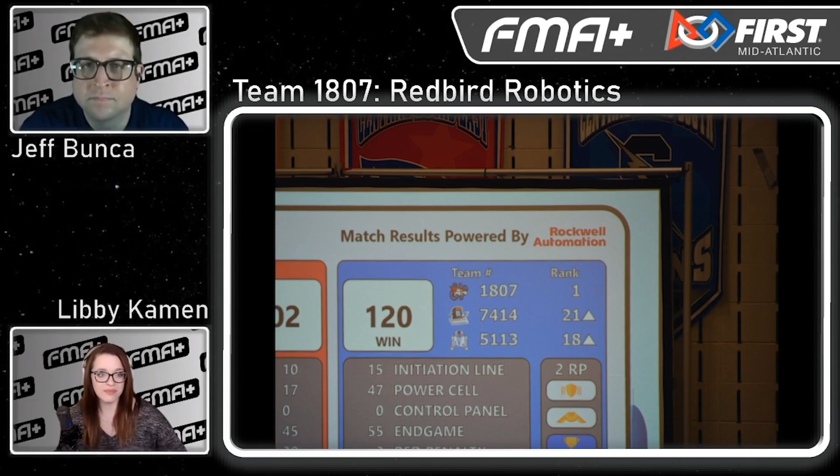So it's kind of a team thing. It's not just okay, we got to shave weight - it's okay, everybody has to shave weight. Shooter has to shave weight, climber has to shave weight, chassis has to shave weight, collection has to shave weight. And that was kind of hard for us to get our heads around. It was like, well, I'm not shaving weight, well, I'm not shaving. But we kind of had to come together as a team and be like, listen, this isn't good, we need to get this done.

So we all came together, we all shaved the weight off of our individual parts. Like Dan said, 1/8-inch plates instead of 1/4-inch. We had to go to some drastic measures, right - taking apart the chassis, trying to change things here and there. But yeah, I think we were exactly 125 when we went to competition. It was close.

But I think that's with any team, right? You're always going to come overweight, especially a young design team. We were like, well, what's the weight? And then week 6, we're at 133, and we were kind of sketched out, but we got it done in the end. It's really easy to say, oh yeah, it's a small robot, there's no way 125 pounds could fit in that tiny little package. It absolutely can, and it will.

That's really interesting. I think a lot of teams end up at the same problem, so it's nice to hear from other teams how you overcame it and what changes you made. I love the idea that you're focusing on the whole team diving in together.